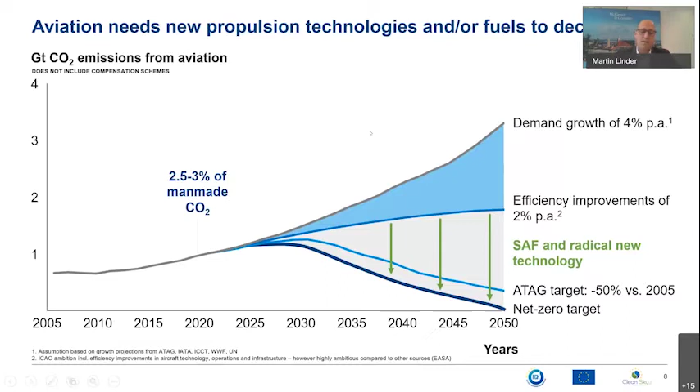The aim of the study was to investigate this latter option, the use of hydrogen to propel the airplanes of the future. In the course of this project, we evaluated whether hydrogen has potential, what technology developments are necessary, at what cost it could be realized, and what challenges need to be overcome. The objective of the study was neither to give predictions nor to provide an in-depth technical feasibility study. The purpose was to understand whether hydrogen has potential and therefore whether serious research and development effort should be devoted towards its development. We performed the analysis on 2 levels, the aircraft design and the infrastructure requirement.

The focus was on hydrogen propulsion. This includes 3 types of aircraft. Aircraft that react hydrogen in fuel cells and the resulting electricity then drives a motor and a propeller. Aircraft that burn hydrogen in turbines, and a combination of both, a so-called hybrid hydrogen aircraft. Our findings demonstrate that hydrogen has significant potential to decarbonize aviation alongside other technologies. It is not the only solution, but it is an important part of the solution.

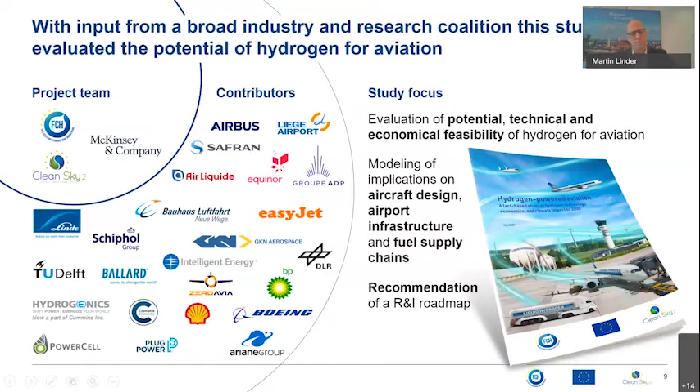These aircraft account for the major stake of the global fleet, about 70%. Less than 5% of emissions are caused by regional and commuter aircraft. The remainder of emissions stem from long-range aircraft. For each of the segments, one concept aircraft powered by hydrogen was designed.

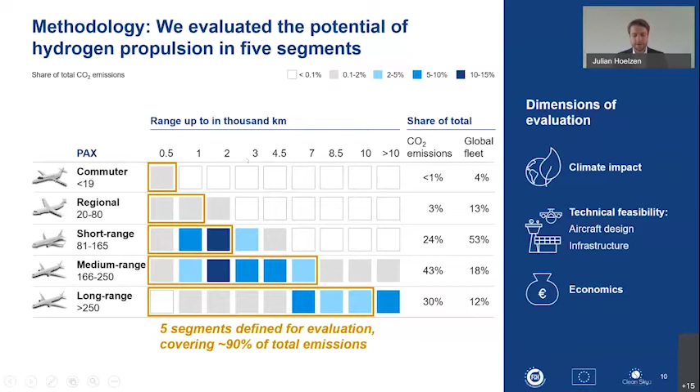For these analyses, we evaluated the climate impact, the technical feasibility, not only for the aircraft design, but also the infrastructure and the economics of such aircraft. In addition to this, we compared hydrogen-powered aviation to aircraft powered by sustainable aviation fuels, focusing on synthetic fuels. Let's turn to our analysis and results on climate impact next.

Let us first take a look at how aviation contributes to global warming. On the one hand, there are CO2 emissions, and every ton of fuel burn produces 3.15 tons of CO2. Beyond CO2, there are also other emissions, such as nitrogen oxide, soot, and water vapor, which create contrails and cirrus clouds. These non-CO2 emissions also have a climate effect. To assess the full contribution of aviation to global warming, we need to consider CO2 and non-CO2 emissions.

There is still an ongoing scientific debate about how much non-CO2 emissions contribute and the translation into an aggregate measure. In this study, we used the concept of global warming potential measured in tons of CO2 equivalent, looking at a time horizon until year 2100. For conventional aircraft, research shows that the climate impact of all propulsion-related emissions could be 2 to 4 times compared to the effect from CO2 emissions alone.

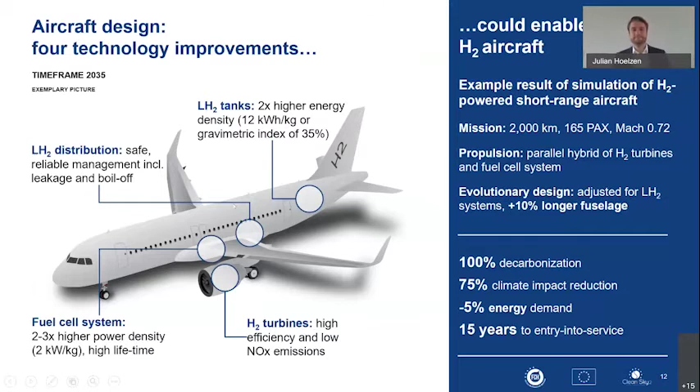In this earlier horizon, until 2040, there are only commuter to short-range aircraft that could possibly fly on hydrogen, given the earlier conceivable entry into service dates of these planes. For illustration purposes, let us assume that 15% of the global fleet is replaced with hydrogen-powered aircraft by this time. In these early years, we foresee no insurmountable technical roadblocks to enable hydrogen-powered aviation.

Hydrogen demand from aviation would comprise roughly 5% of total global hydrogen demand. This demand could thus be served by the prevailing hydrogen supply industry. There would only be need for limited infrastructure updates beyond that at airports, given the smaller share of hydrogen flights and low amount of fuel needed.

For example, liquefaction could happen off-site, and aircraft refueling could happen via liquid hydrogen refueling trucks, a technology that is already available today. Refueling times could become longer as volumetric density of liquid hydrogen is lower than kerosene's. However, we believe that the aircraft turnaround times don't need to be extended for these shorter range flights. Of course, new safety procedures need to be introduced and well researched.

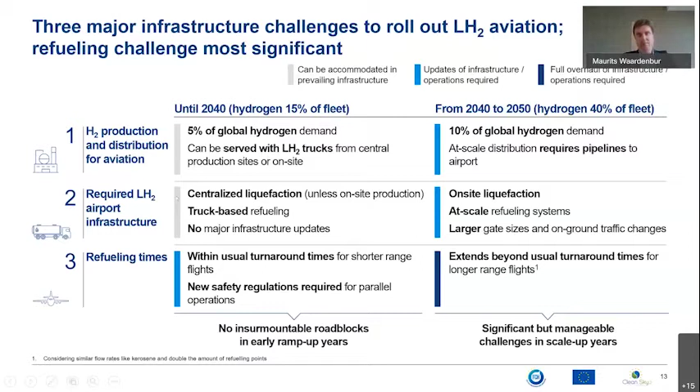Let us examine the case of a short-range aircraft first, as an example. In 2040, our analysis shows that a hydrogen aircraft would increase total cost of ownership by 25% for a sample flight of 2,000 kilometers. To illustrate that, that would be equivalent to about 18 euros additional cost per passenger.

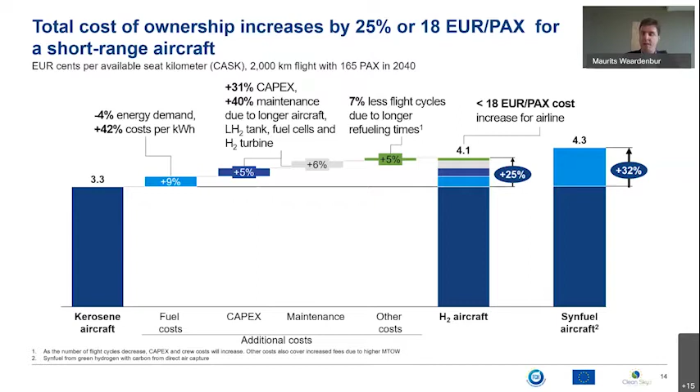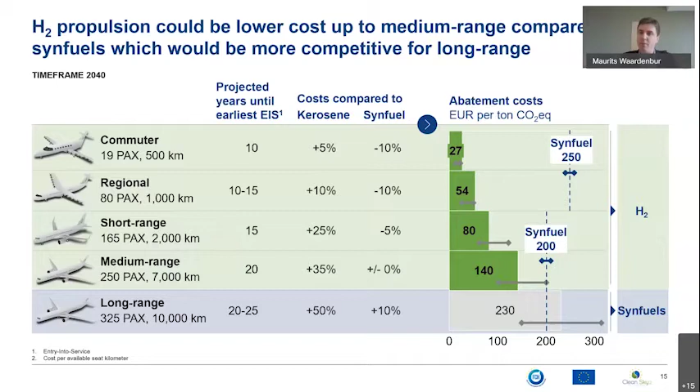So to estimate what the impact of hydrogen in aviation could be, we developed a scenario in which the aviation sector is fully decarbonized. The scenario assumes that the technology gets developed and commercialized as described before. This results in a picture in which hydrogen and sustainable aviation fuels, including syn fuels, are complementary and jointly cover all aircraft segments from commuters to long range, indicated by the green and blue areas in the diagram. In this scenario, hydrogen-powered aircraft initially replace conventional aircraft in the commuter to short-range segment and half of the medium-range segment. So how does that work in detail?

Commuter, regional, and short-range hydrogen aircraft would start to come into service between 2030 and 2035. New aircraft after these years are assumed to be hydrogen-powered. Medium-range hydrogen aircraft start to become available after 2040. In this segment, 50% of new aircraft are hydrogen-powered and 50% are supplied by synthetic fuel. We do not foresee hydrogen propulsion for the long-range segment until 2050. For this segment, syn fuel is the more feasible and cost-optimal solution. All aircraft that are not replaced with hydrogen aircraft are powered by sustainable aviation fuel.

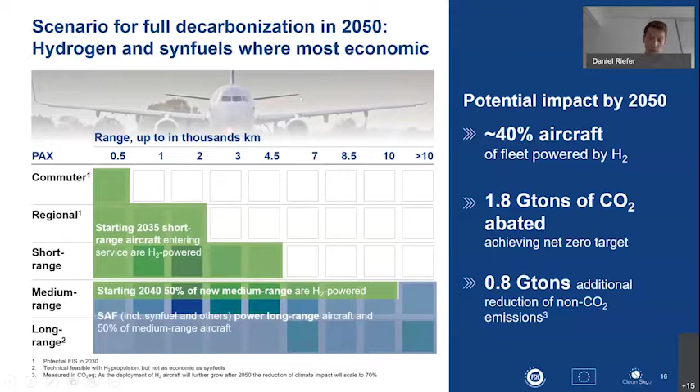In the second horizon, from 2028 to 35, and building on these designs, we envision a medium-range aircraft demonstrator for a potential entry into service by 2040. By then, a safe and efficient refueling setup for airports should also be available. Lastly, until 2050, further assessment on hydrogen as an energy source for long-range aircraft is required, such as the development of a revolutionary demonstrator concept.

In parallel, innovation should focus on developing a large-scale refueling infrastructure, with at-scale solutions for insulated airport pipeline refueling systems, so-called hydrant refueling systems. In our report, these milestones are detailed in 4 work areas. Firstly, components, the integration into aircraft systems, infrastructure, and a supporting regulatory framework. You can find more details on the research and innovation priorities in our report.

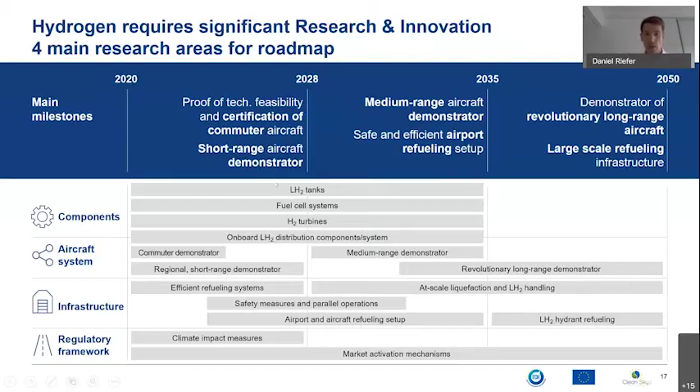So in order to achieve net zero, R&I investment needs to happen already today. It will require a significant budget, and both industry and regulators need to work together to remove roadblocks on the way ahead. So all in all, our study shows that hydrogen propulsion has significant potential as one major option for decarbonization, alongside other technologies, such as sustainable aviation fuel. There are 4 main takeaways that summarize our findings.

Firstly, hydrogen can become a compelling option, mostly because of its efficiency and climate performance. Serious technology development is required in fuel cells, storage, and liquid hydrogen systems, but the technology challenges seem manageable. Action is required now. To meet the 2050 net zero target, research and innovation need a major boost. The short-range demonstrator airplane is required by 2028, with subsequent development as presented before.

Economics are feasible. The per-passenger price premium for traveling on a hydrogen-powered short-range flight could be about 18 euros. For segments up to short-range flying, this could be less than the price premium resulting from synfuels. Climate impact can be significantly reduced. A hydrogen airplane has 0 CO2. Its total climate impact, also counting non-CO2 effects, is up to 70% lower than a kerosene aircraft. This makes it the lowest emission option for commercial flights.

So this concludes our short presentation of study results, and I hand back to the colleagues to take us through the further program.

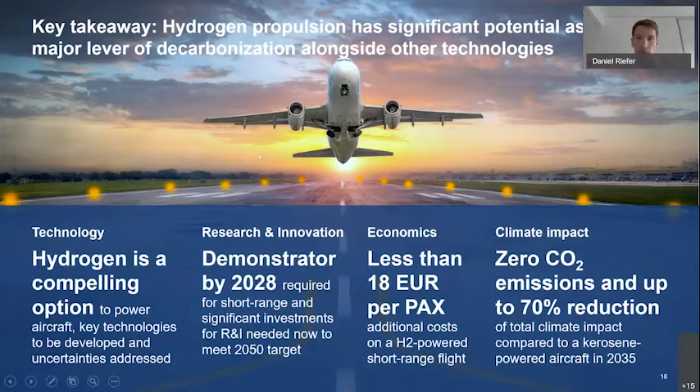Excellent, thank you, Daniel. And I believe we now have the Commissioner Vălean also on the line. We'll try to unmute her now. Commissioner Vălean, can you hear us? Yes, hello. Excellent. I deplore the fact that I couldn't connect video. Apparently my team here tried to do that, but with all the logistics here in the commission, in the office, layers and layers of security, apparently we couldn't connect to your call. But nevertheless, it's a pleasure for me to be part of your debate today. The presentation was really, really interesting.

And if you will allow me, I would give you a couple of my thoughts with the view of what we are supposed to work on, meaning the decarbonization of the aviation. I do believe that it's also a right time for us to step up the work to reduce the emissions in aviation, and it's potentially with the help of hydrogen. We are about to launch a European hydrogen strategy from the research and innovation side. We are proposing a new joint undertaking for clean aviation under Horizon Europe. I know you'll have later Commissioner Gabriel also. And we are preparing our comprehensive strategy for sustainable and smart mobility for later this year.

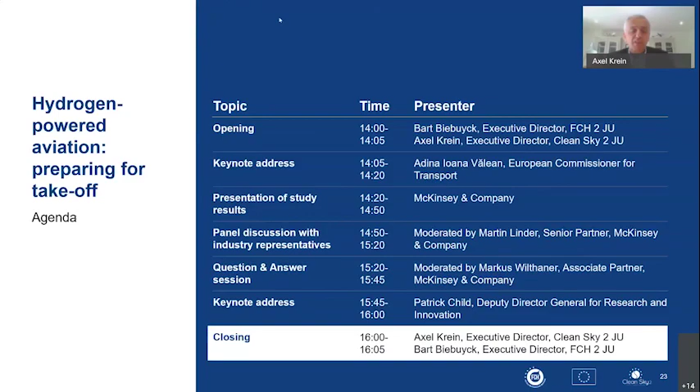So we all agreed today that our ultimate goal is to achieve climate neutral aviation by 2050. We have also heard that turning this ambition into reality requires the seamless integration of a range of important new technological advancements, one of which is hydrogen-powered aircraft. And this comes hand in hand with future aviation priorities, such as, for example, engine architectures, hybrid propulsion, more electric aircraft, ultra-efficient configurations, and not to forget lighter airframes. I'm very confident that this mix of various game-changing technologies will finally make us reach our final destination.

But, and I think that's a point to highlight at the end, it's not sufficient to only develop all of those technology bricks. It is of utmost importance that those bricks are tested within an integrated demonstrator or demonstrators in order to ensure that the interdependencies of those technologies are properly organized and optimized. In this context, as I said just to Patrick before, the support of the European Commission is absolutely vital in order to achieve those super ambitious targets. And we count on the Commission to support us in this way forward.

And I think what was also very apparent, we have to start now in order to meet the timeframes mentioned, so that by 2050, climate neutral aviation becomes the reality. With this call for action, I would like to hand over back to my colleague Bart.

Bart, please. Thank you so much, Axel. Yes, I can only repeat something very important that you mentioned as well: the message that heavy R&I investments will be necessary to really build this demonstrator by 2028. And again, I want to emphasize, as we all heard today in the webinar, the hydrogen sector, which is represented mainly by Hydrogen Europe, the industry, but also Hydrogen Europe Research, the research community, is really ready to take off and looks really forward to cooperate with you and the whole aviation industry.